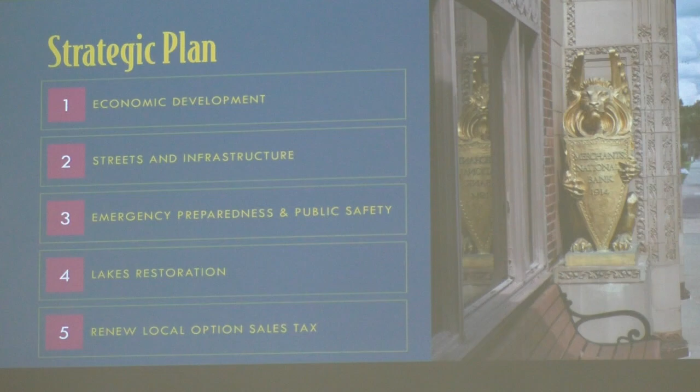The last time I was here, we had just launched the city's strategic plan, which is a 5-year all-encompassing plan that talks about what the city's initiatives are going to be, all-encompassing citywide. We had broken it down into 5 main points that we wanted to focus on for the next 5 years.

And the thing about the strategic plan is, in my time with the city, I have worked on a lot of plans. I've been here for a year and a half, and I have had to review 2 housing assessments, a downtown assessment, a comprehensive plan, a land use plan, a master parks plan, a capital improvement plan, and a pavement and streets quality plan.

It seems like before I started, it felt like the city was always putting out all of these plans, and what were they doing about them. So the strategic plan is when the city council and the mayor get together along with city staff, and they really take a look at those plans and break them down into tangible things that need to be done, and then create this all-encompassing plan that goes over top of it and says, these are what we're going to focus on, and these are what we're going to work on for the next 5 years.

This is how we're going to spend our money, whether that be money from property taxes or from local option sales tax or from grants or from federal funding, any of that stuff. This is how we're going to spend the money, and this is how we're going to make this community better for the people who work and live here.

So like I said, we had 5 major pillars in our strategic plan. I'm going to go a little bit out of order on updating you guys on these because one of them is already done. At the election last month, we successfully passed our renewal of the local option sales tax.

Local option sales tax, because I don't want people to forget how important this is to our community, it generates about $1.6 million per year for the city. And that all gets reinvested locally. It goes toward your streets, it goes toward your library, it goes toward your parks, and makes those spaces better. It's a really dependable source of revenue, and it's one that isn't entirely contingent on the people who live here.

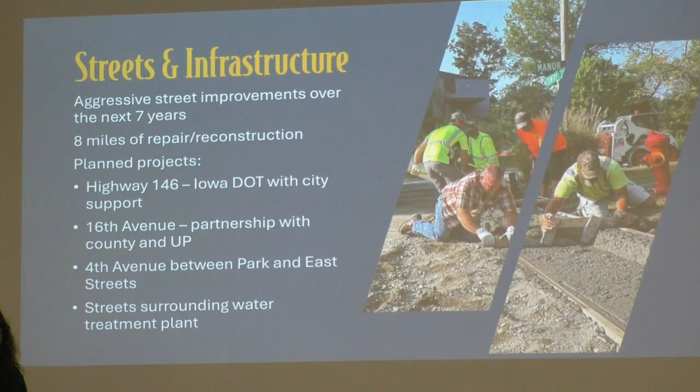Our next pillar is streets and infrastructure. I'm not going to talk about water infrastructure because it's a huge topic and Keagan has like 40 slides on it. But we are working on water infrastructure improvements, and it's going to be amazing — he'll tell you all about that. I will talk about streets, because there's a lot coming.

We are aggressively improving our streets over the next 7 years. We have a whole plan listed out. If you want to know which streets are going to be repaired and in what year, I can find that in the plan and tell you — please reach out to me. I'm not going to publish that one online because it's a huge document.

In the next couple of years, the Iowa DOT already started patching on Highway 146 — you've probably seen it if you've gone out to Walmart. I'm really sorry, that one's not us. Then they're going to do an asphalt overlay and a 4-to-3 lane conversion on that highway in the summertime. It's also going to be paired with a lot of underground work, whether that's water or sewer. We're also expanding the sidewalks, the bike trail, and some of the lighting out there. So there's some city involvement in that project to make the highway more user-friendly for pedestrians and bikers, and to make sure it's well lit and easily usable. But the DOT is doing the road work because it's their road.

And then on 16th Avenue, we're partnering with the county and the railroad to expand that, put in curbs and gutters, and expand it so it's a little bit easier to walk on, and you don't hit skateboarders, bikers, and walkers along that road. I think there will also be some lighting upgrades along there too.

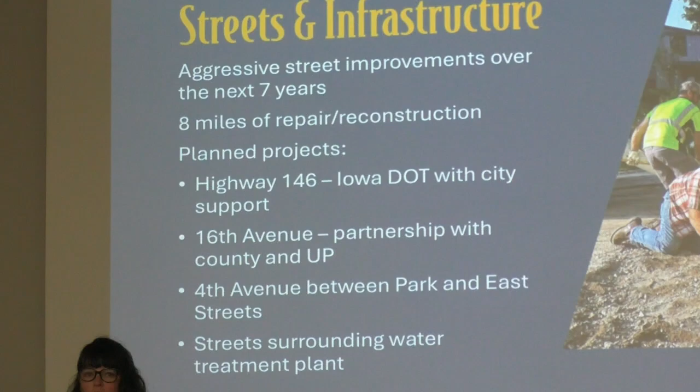And then the streets surrounding the water plant, once we're done with all of that construction, those are going to be a priority to get fixed around the water plant and Mayflower, so that they're not all gritty and gross and beat up from all of the construction work that's been happening over the last few years.

Emergency preparedness and public safety was our other focus for the strategic plan. We have had some interesting things happening already, and we will be doing some more things moving forward.

The police department just announced today that they got their accreditation for the CALEA law enforcement accreditation, which is a really big deal. They went through all of their policies and procedures and also their building, basically word by word, to make sure that they met national standards and refined and updated them. There are only 13 communities in Iowa who have this accreditation, so it's kind of a big deal. It's to make sure that our police department is up to standard and is following regulations and procedures that are nationally recognized across the board.

Our fire department and EMS team have also expanded. We're now up to 8 full-time and 1 part-time certified paramedic, which is amazing, because once they get to certified paramedic level, they can provide advanced life support instead of basic life support. So as opposed to just doing CPR, they can do IVs, administer drugs, and do things they wouldn't be able to do as basic EMS staff.

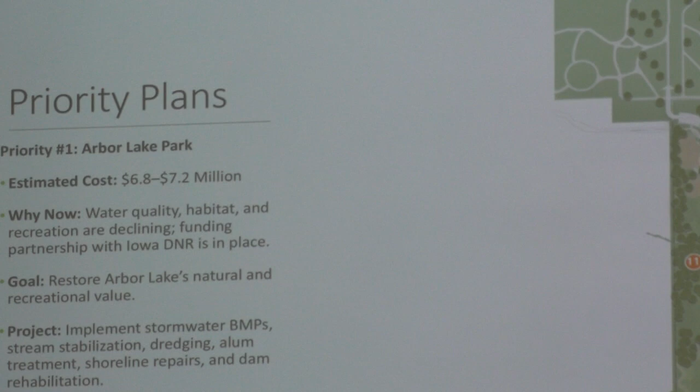So this is the fun part of it, the priority plan. Priority number 1 in the plan is Arbor Lake.

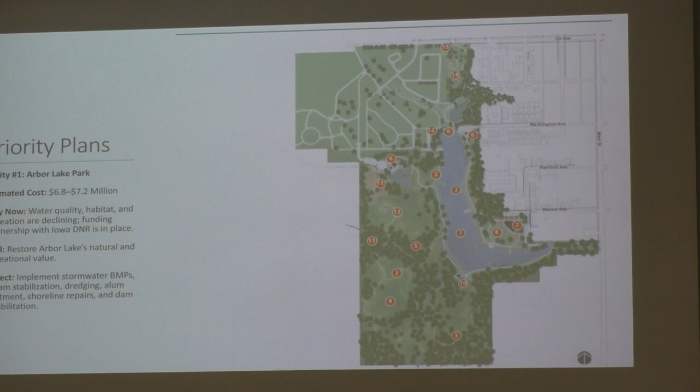And the cool thing is that we're already in the process. We've hired an engineering firm, Houston Engineering, Inc., for restoration on this body of water in partnership with the Iowa DNR. So we're in process with that now. They'll be engineering this project. So when I say project, it would just be the lake and the watershed stuff.

And then the park amenities would come in a little bit later. Over the next 12 months, there'll be engineering. We'll have some open houses on some design and stuff like that.

But basically, we need to dredge that body of water. There's 50,000 cubic yards of sediment in there, and it hasn't been dredged since the mid-'70s.

And a lake generally in Iowa goes about 50 years before you need to dredge it again. So we're at that point, and we want to make sure that it is a viable recreational space for the community for many, many years to come.

And so there'll be key features that we put in there. So an idea would be to pave the trail all the way around the lake, have ADA access to all the fishing jetties, and then kind of the hub of the park right here would be...

What is called in the plan the Commons, which has a day lodge and play spaces and natural play for the kids.

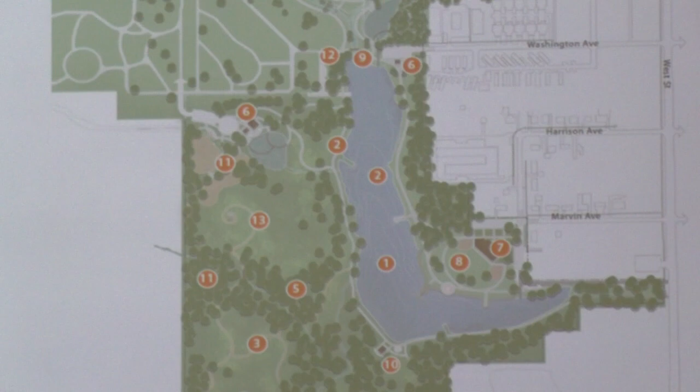You'll see the estimated cost is around 6.8 to 7.2 million. About 6 of it's going to come from the lake restoration part of it.

So that would be priority 1, which also leads into priority number 2, which would be Lake Nyanza at Miller Park. Lake Nyanza is actually within the watershed of Arbor Lake.

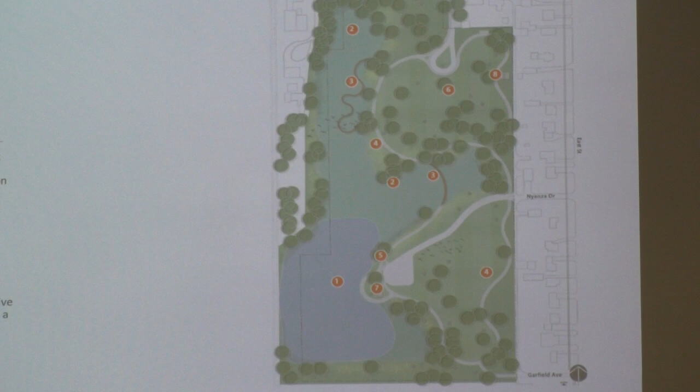So to do the project at Arbor Lake, we have to include Nyanza as well. So the current engineering that we're doing on Arbor Lake also includes Lake Nyanza at Miller Park.

Right now, what is suggested is to turn that body of water into possibly a natural wetland, depending on what the U.S. Army Corps of Engineers lets us do with this.

But this body of water was originally just to fill the steam engines on the railroad, so it was never really meant to be a recreational body of water. It has a mean average depth of about 2.5 feet, and there is 50,000 cubic yards of sediment in that one as well.

And if everyone knows, Miller Park is a little bit landlocked, which causes a little bit of issues if you wanted to do a mechanical dredging.

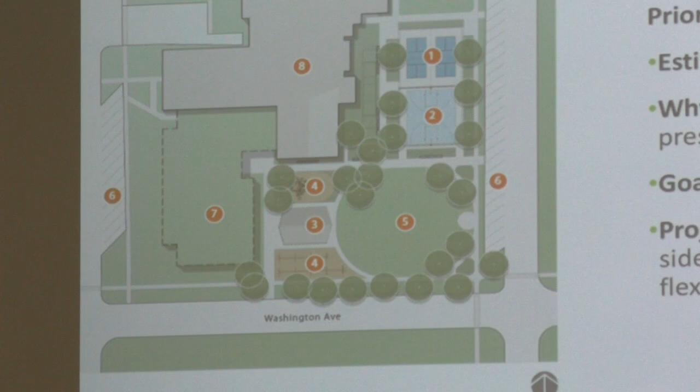But we're in the process of those 2 projects. And then priority number 3 is actually Davis Park, which is the land at Davis School.

We are actually under contract with design right now with the firm that did the master parks plan. And over the next few months, we will probably be publicizing what an actual design of this space looks like.

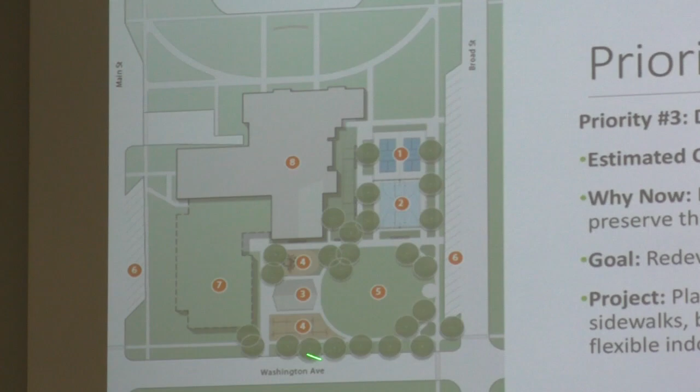And the hope is, if everything goes as planned, we could be making significant construction on that next year, at the end of next year. But we will cross our fingers.

Priority 4, which is going on right now at Central Park, is the Veterans Memorial Monument. Adrienne touched base on that a little. That'll be coming up next summer, and it's in process right now.

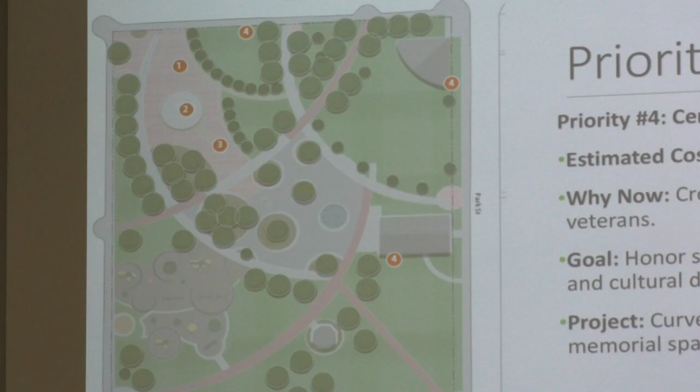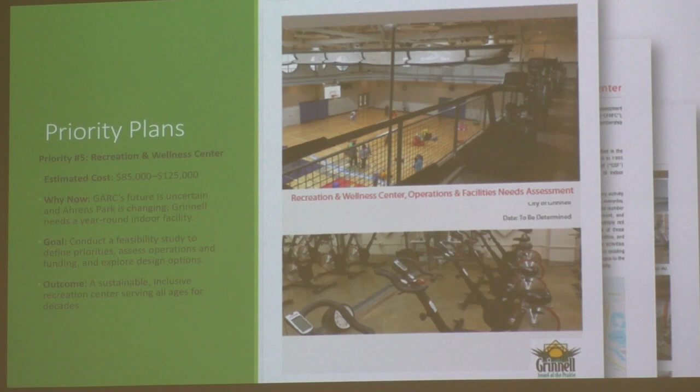Number 5 is a feasibility study on a new recreation and wellness center. As I mentioned, people want a one-stop shop for recreational needs heading into the winter. The first step would be doing a feasibility study to figure out how we'd fund it, operate it, and where it could even go. We would contract a firm to do this study, and piggybacking off that would be a soccer complex feasibility study as well.

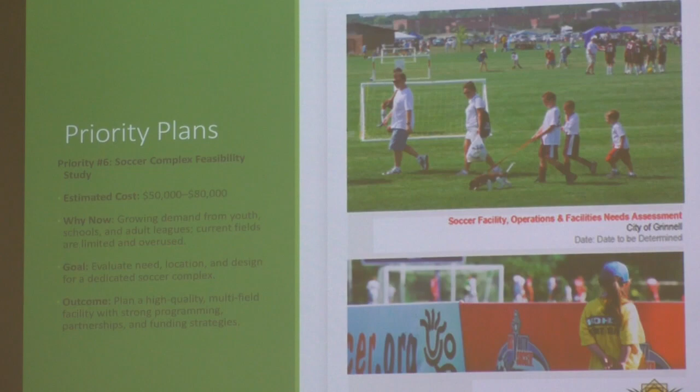Soccer continues to be a very popular sport nationally and is growing in Grinnell. We have roughly over 300 kids who play youth soccer here. With the space impact from the new elementary school, we hope to find a new space to keep growing this sport in the future.

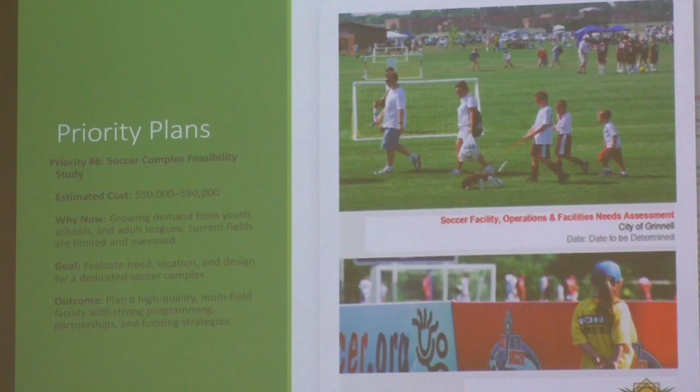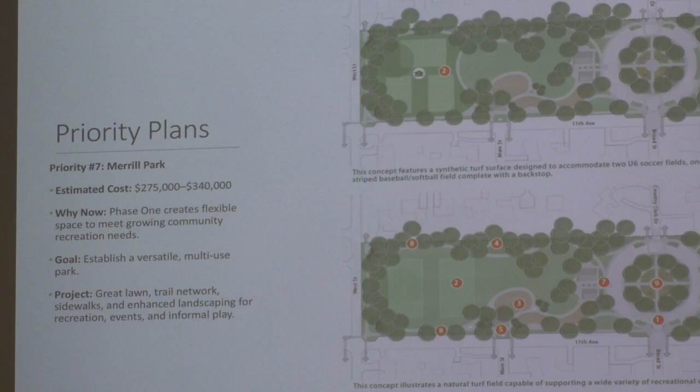Merrill Park is number 7. The estimated cost shown here is for this end of the park, the west side. The idea would be to remove the ball field and create a multi-use green space that could serve a variety of activities, while keeping the infield layout with the backstop so people could still use it as a practice space if they want. We'd also consolidate the playground on the western side so it's not split anymore, and add natural art in the center circle with a natural landscape on the eastern side of the park.

Priority 8 would be Summer Street Park. The priority there is to update and expand the existing playground, and then clean up the creek, making a creek walk and creek restoration project down there in the future.

Expansion of the skate park is another priority. It's been open since 2019 and is used almost every single day, with tons of kids there during the summertime. It's probably one of the most popular park amenities we have.

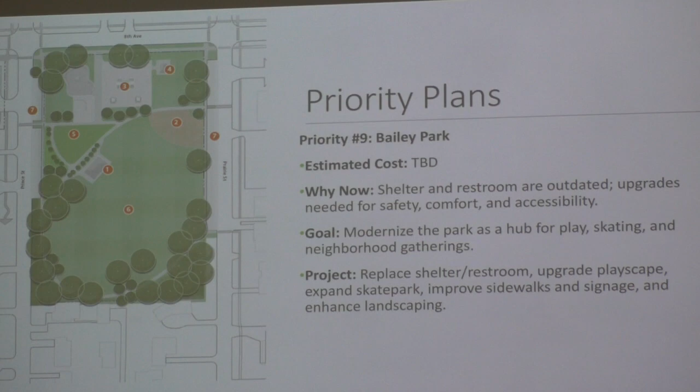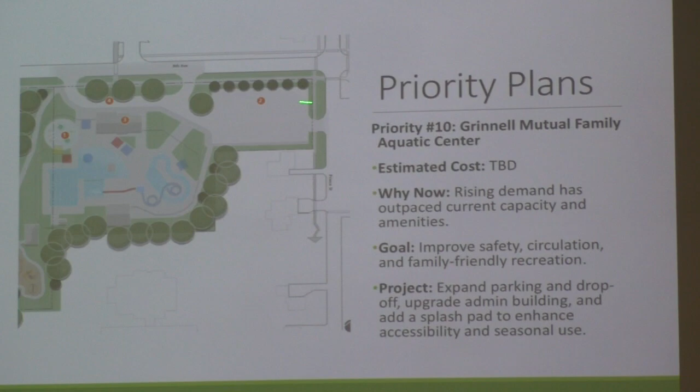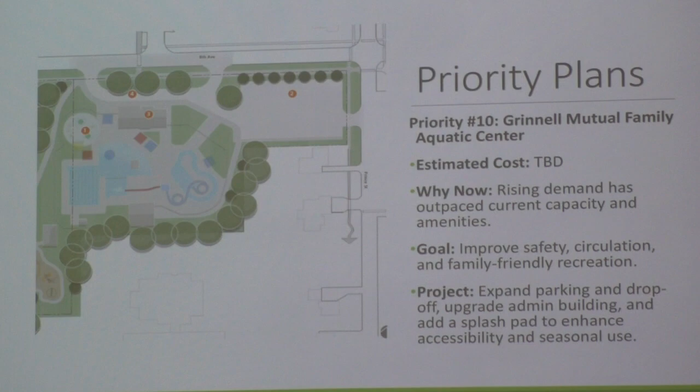The aquatic center is priority number 10, with priorities mainly being expanding the parking and creating a drop-off zone, expanding the bathhouse for staffing considerations, and possibly implementing a splash pad as a new amenity—though I can't guarantee that will happen anytime in the future. The final priority would be updating our signage and wayfinding master plan.

When implementing these park projects, signage is key to making sure people know where they're going. We have a brand, so developing a master plan for what that brand could look like will set us up for the future as we work park by park and update signage so it's consistent throughout our parks and recreation system.

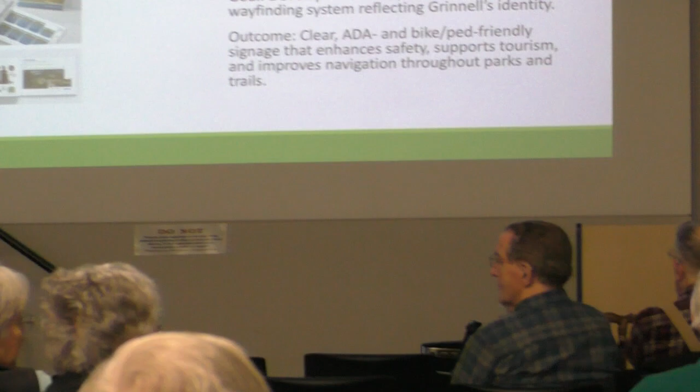Question: What is the timetable as you move down these 11 priorities? Do you finish number one before moving on to anything else? Answer: Priorities 1 through 4 are actually all in motion. I'll say 1 and 2 will probably take up a lot of our time over the next 5 years—projects restoring bodies of water take on average about 3 years from the start of construction, and we're still in the planning phase. So that'll eat up a lot of our time. We could probably sprinkle in some of the smaller ones, like the feasibility studies, since those are more plans and studies and don't take much manpower. But after that, the rest are out into the future—probably 7, 8, 10, 15 years for some of those, for sure.

Question: How did you define cultural diversity as it pertains to Grinnell—is that done by percentages of different ethnic groups? Answer: When they did their demographic research and talked with focus groups in the community, the trends of our community and parks and recreation, that's how they determined it.

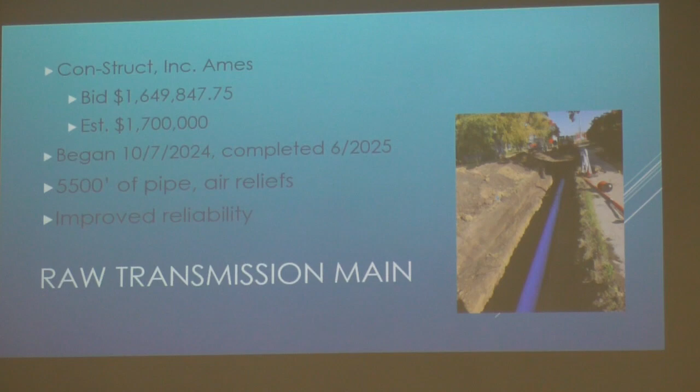First project I wanted to mention is, for all intents and purposes, complete: the raw transmission main project. This was the piping that carries water from our wells to our treatment plant. Some of it was in bad condition, some was fine, but we wanted to make sure it was replaced in preparation for the new water treatment plant. We wanted to increase resiliency and make sure everything was super reliable. Con-Struct out of Ames and Marshalltown did this project for us.

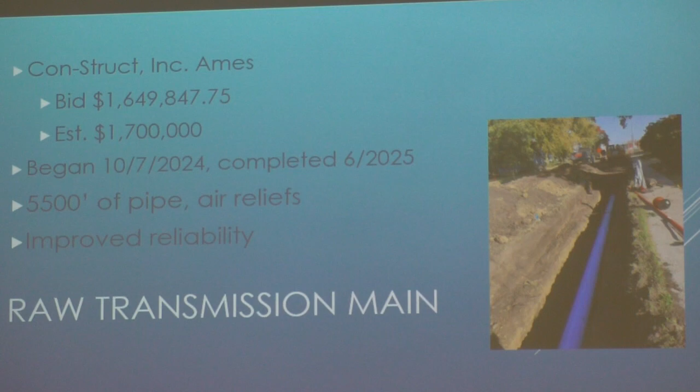They did a really great job, great crew to work with. I think there was about 5,500 feet of pipe put in - raw and treated water main east of East Street along First Avenue. That was kind of a problem area, and since we were going to be there anyway, we went ahead and took care of it.

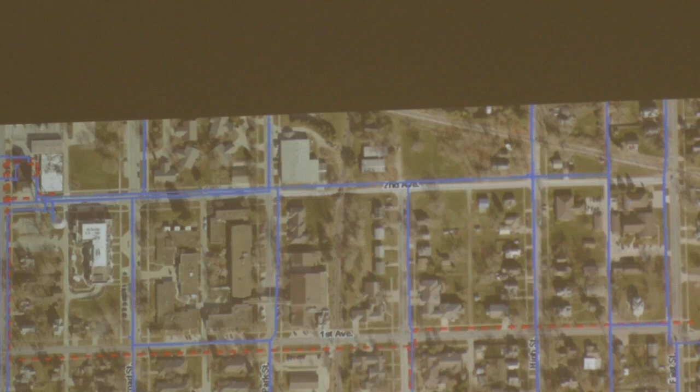This is a blown-up photo of the route. Here at the upper left we have the water treatment plant. We followed Main Street down, then went down First Avenue to Well 8, which is clear over here. I don't know which button it is - it does have a laser.

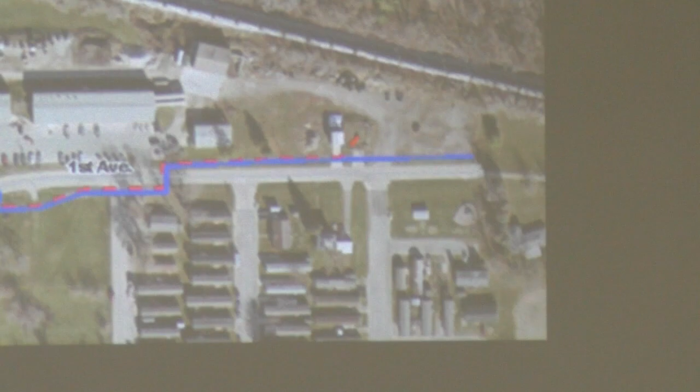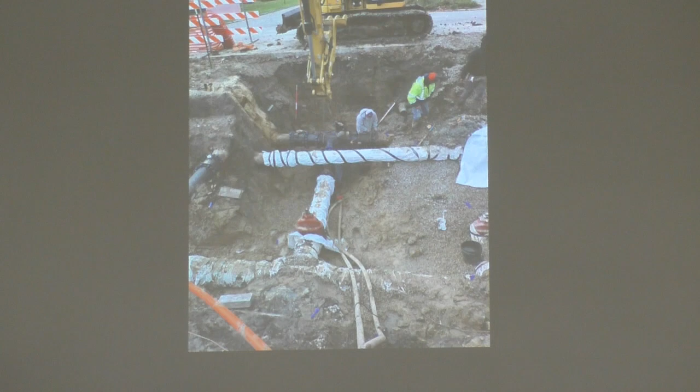This photo illustrates the process of laying that water main. Dig a big trench, get it down to the right elevation, install the pipe, wrap the metal parts with plastic to keep the soil from contact. That helps inhibit corrosion.

This orange tube is going to be a duct for our fiber communication lines that we're going to use to communicate with our wells and our new water tower. Our control wiring currently is based on telephone lines, which are generally reliable, but if we have a derecho or an ice storm, it can really mess things up. So we're not getting signals from our wells or water tower, and we have to do things manually, which isn't ideal during a disaster. So this will be underground and super reliable.

Like I was saying before, we lay that pipe down, bed it in rock, and then they backfilled it as we went. This is ideal when installing water mains because it impacts people's driveways less and creates fewer safety concerns if you're filling up as you go. Sometimes that doesn't happen on projects, but these guys did a really great job of it.

You can see here we have a gas service and a water service. We encountered plenty of that along the way.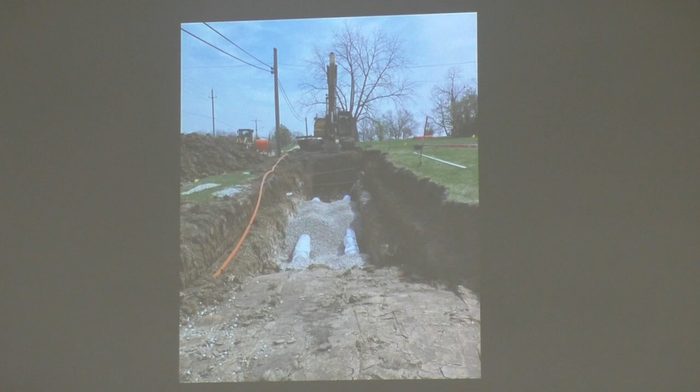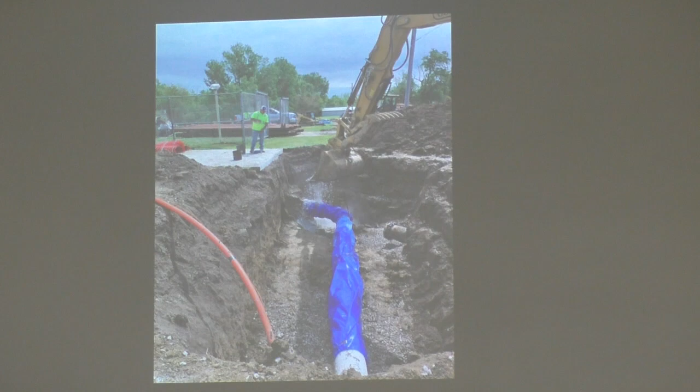This is the end of the raw water main project at well 8, which is inside this fenced area here. We tied on to the existing piping. There will be some more work done with this along with the water treatment plant project too, so some of this will be dug up again within the next year.

Next project is well number 10. Before we move on, can I ask you a question real quick? Yes. So that's a lot of digging you've done and an incredible amount of work. How long would ideally all that last? I know you just talked about redigging some of it in about a year, but all that piping and the fiber you laid as well, how many years do you think that will go, or should?

The industry says that plastic pipe should last about 100 years. We have cast iron pipes that were put in at the turn of the last century that are still serving the community, so plastic's supposed to last longer than that. Should be good for a long time.

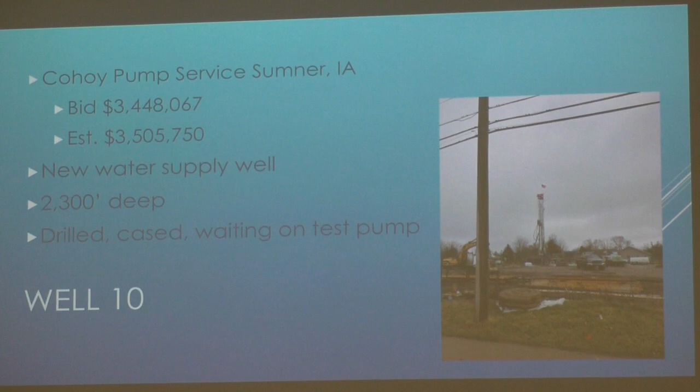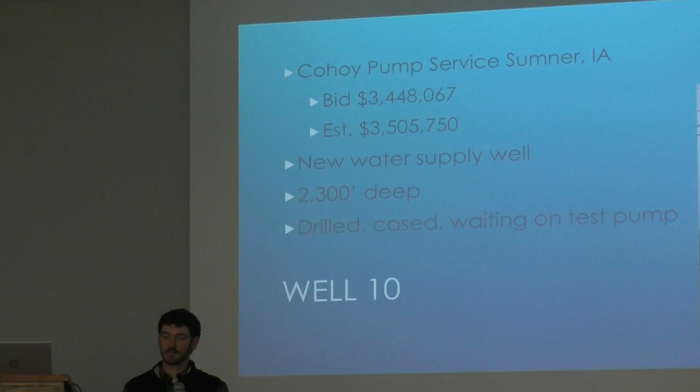So well 10 should be complete within the next month. This hasn't gone exactly according to plan. The timeline has been extended a few different times as we've run into issues. The hole is drilled, the well is cased, everything is in there as it's supposed to be. It's just taking a lot longer.

They should be test pumping this well tomorrow evening or Friday, and that's the final piece of this phase of the puzzle. It's about 2,300 feet deep. Our pump will be sitting at about 640 feet. It's supposed to produce 1,200 gallons per minute, and during the last testing we were able to do, it was producing 1,480 gallons per minute, so we're good there.

This picture is kind of small, but you can see the well drilling rig that they set up initially on site. This was before really any major water treatment plant work started.

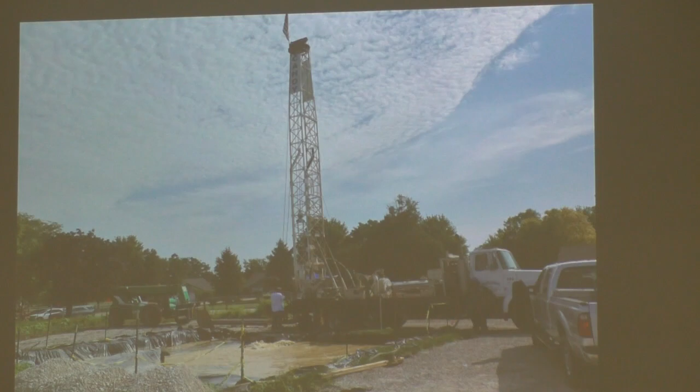Here's a closer view when they started drilling the well. This is called a slurry pit. The well drilling process actually uses air and water to lift the cuttings from the bottom of the hole rather than physically removing it. There's a drill bit that rotates and crushes whatever substrate they're going through, generally rock, into little pieces. The center of the bit and the piping going all the way up to the drill rig is hollow, so they force air and water down to the bottom, and the air carries everything up to the top into that slurry pit for removal later. Kind of an interesting process. The well drillers use all sorts of agents to make the water a certain density to lift out different types of rock. It's all much more complicated than what I understand, but I have a surface-level understanding of it. Pretty interesting process.

Well 10 is at Broad Street and 2nd Avenue, right in front of the new treatment plant.

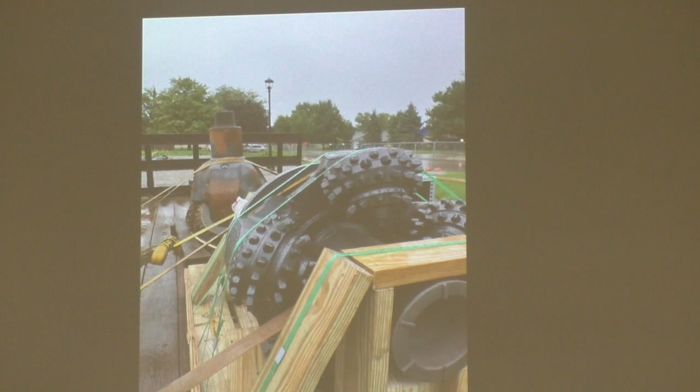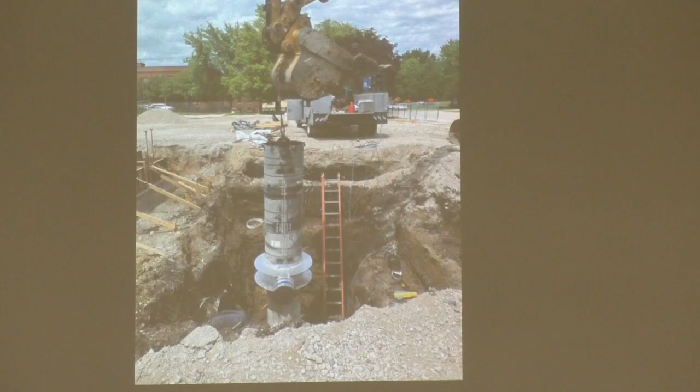Next is the water tower. We've probably all seen the pedestal out on East Street, south of Ogan Avenue. This one's going really well. The concrete pouring process was really neat, and I've got some good pictures of that. The pedestal was done in September, and they're starting to weld on the tank portion now. They're hoping to lift up the tank in February, but I'm not sure they're familiar with February weather. Caldwell's from Kentucky, they build tanks everywhere, so I think they'll be pushing it to get that done before spring, but we will see. This is supposed to be online in August of next year.

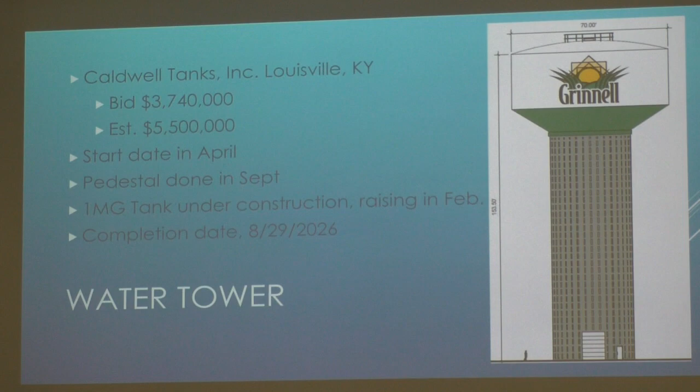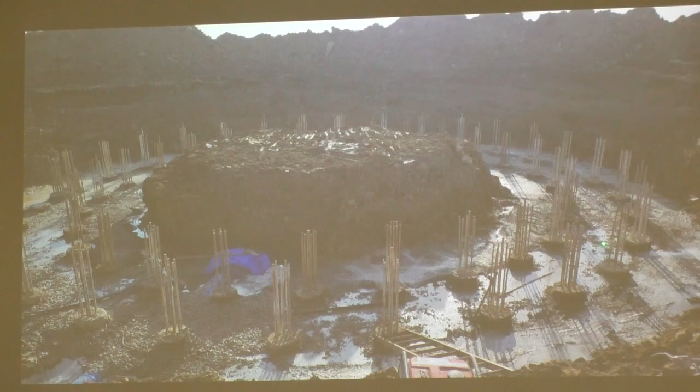Initially, they cleared a little bit of land. They brought in a crane with a huge auger and drilled piers 75 feet deep, filled them with grout and rebar to create the deep foundations for the water tower. You can see the rebar sticking out here. There's around 52 of these piers that were drilled in, and it only took about 20 minutes to do each one. It was a pretty interesting process.

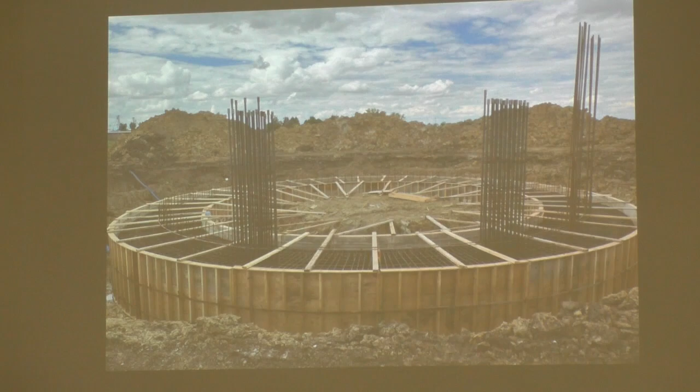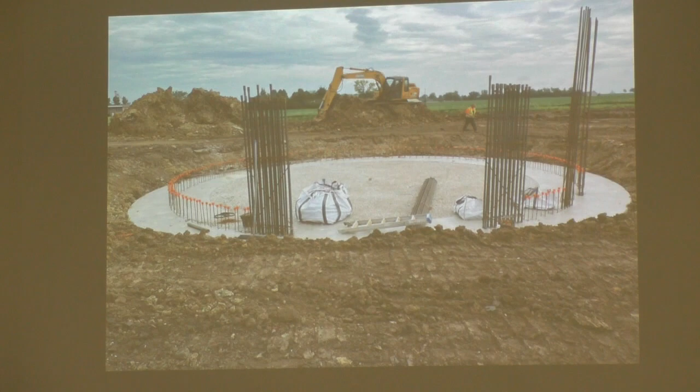These piers go all the way around the circumference of this hole. Then the next step, they formed up a big concrete donut around the top of those. I want to say this was about 75 yards of concrete, but it could be more than that, I can't remember off the top of my head. These rebars here are reinforcement for around the garage door and also the walk door that will be installed in the pedestal later. So there's that footing completed.

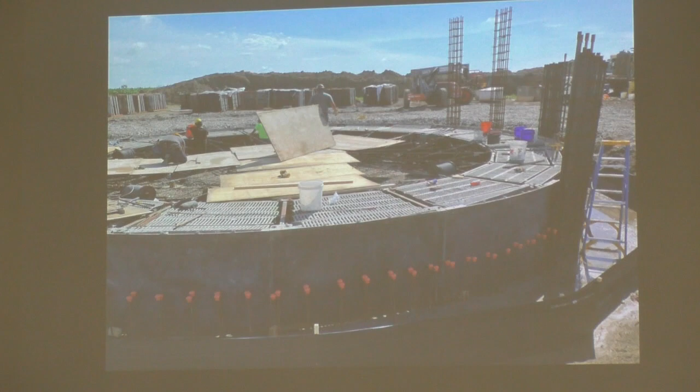Here's the beginning of forming for those rings that built up the pedestal. Pretty cool process - in the center they have what they call their platform. It's actually supported by the interior forms while they're going up, so this platform travels with them as they're working. This is the inside of the form, and then the outside will go around. They go up 3 or 4 courses, pour a few, then leapfrog the forms, and that platform climbs with them. Pretty interesting.

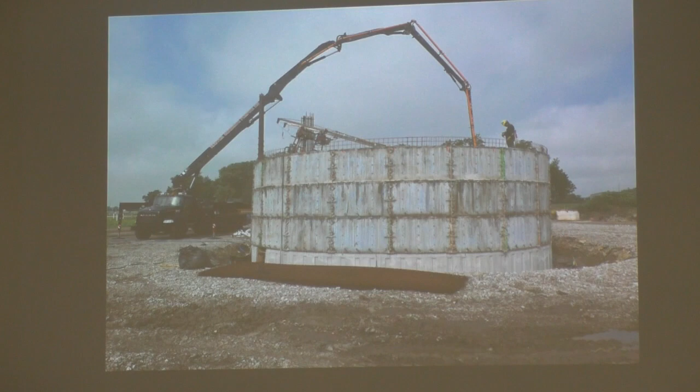So here they are pouring. Every bit of that concrete was pumped through a truck like this. This is the reinforcing steel that they use. They have little cranes that rotate around so they can lift materials up to the top.

Here we see the pedestals getting close to being completed, and they've moved in forms for pouring the dome at the top of the pedestal. That actually forms the bottom of the tank. There's no water inside of this structure - aside from a few pipes, it will be open all the way to the top. We'll use this for maybe a little bit of storage, and we'll have some controls inside of here, and that'll be about it.

This is a picture of the final pour of the pedestal, and over here they've started moving in steel. This was just a couple of weeks ago. They've progressed a little further now, but I haven't had a chance to take a recent picture.

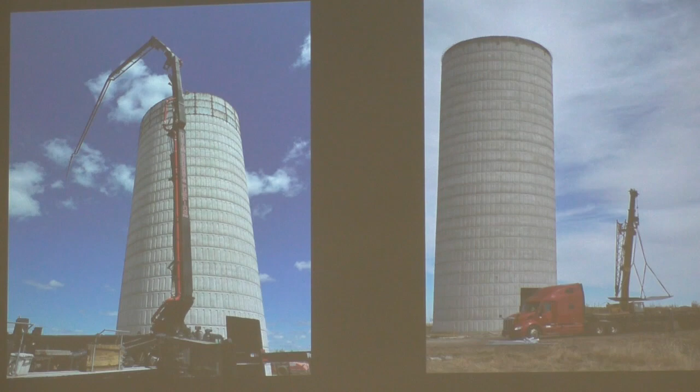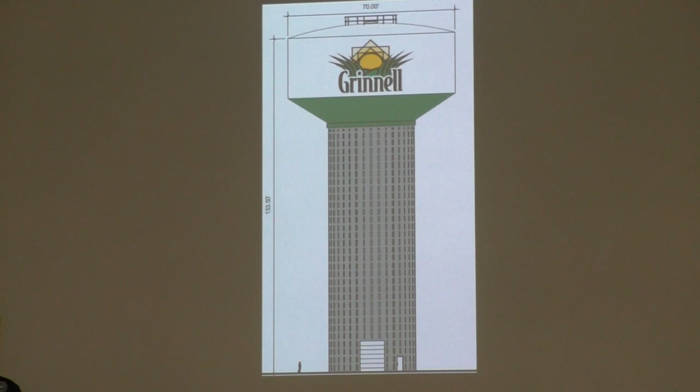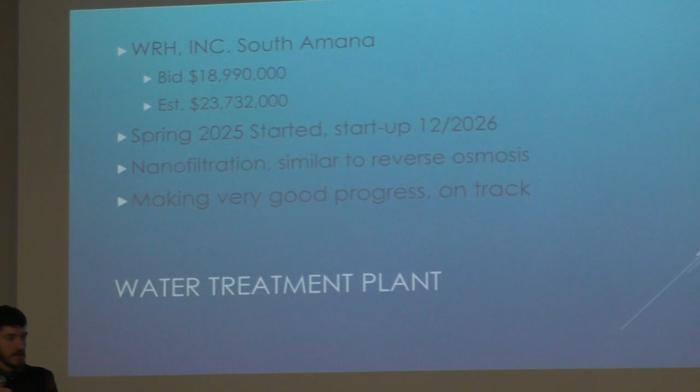The water treatment plant is well underway. We should be able to start using water from the treatment plant next December - pretty exciting, I'm ready for that, and I'm sure you all are too. We're going to be using a nanofiltration treatment process, which is very similar to reverse osmosis - basically high pressure water forced through a filter to remove anything other than water.

Everything is going basically according to plan, but we're on track. We've had a couple of hiccups, but you'll have that on a big job like that.

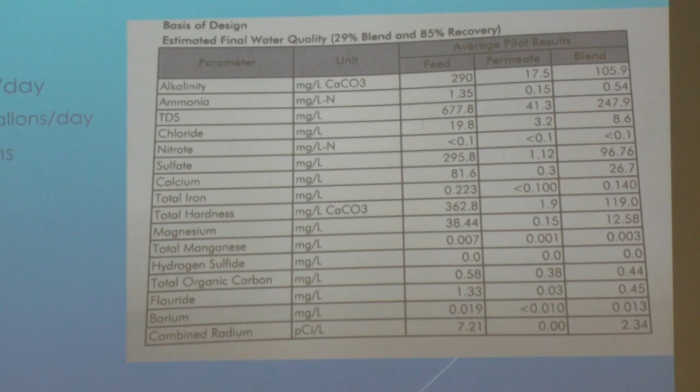Day one, we'll be able to produce 2.1 million gallons of treated water a day. Currently, we only go through about 1 million, so we have plenty of excess capacity if industry were to come to town and the population were to grow. But the treatment units installed day one will be able to be expanded to about 2.6 million gallons a day by just adding a few more pressure vessels. So we have plenty of flexibility there.

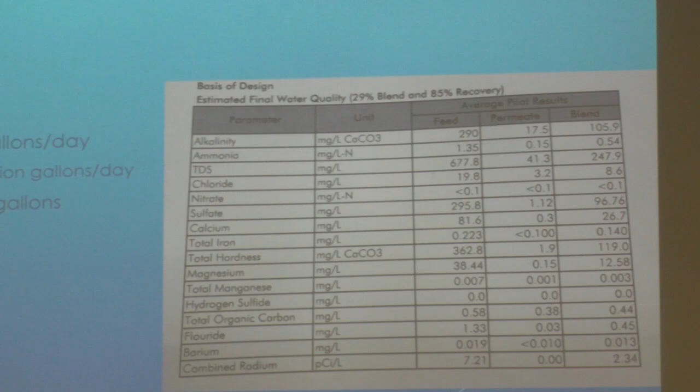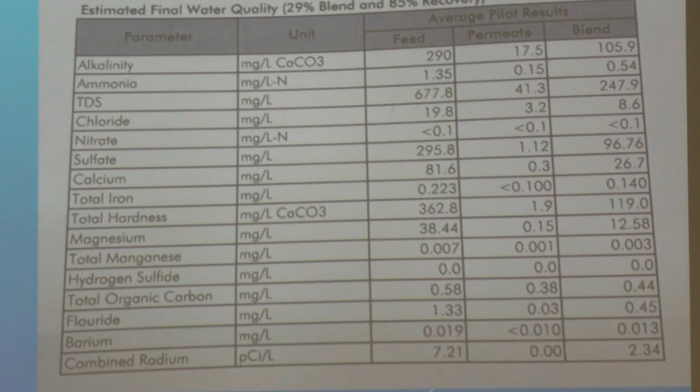On the right here is the water quality factors that we used in designing the treatment plant. We got a lot of these numbers from a pilot study, where we took a miniature treatment plant, set it up beside the existing one, and ran water through it to see what would happen. This column is the water we were feeding to the pilot unit, and this is what we got out at the end.

Some of these parameters are kind of targets. Let me see what I'm looking at here - 119, that's 119 milligrams per liter of hardness. Currently we're putting out about 340, which I'm sure you've noticed. This equates to about 7 grains per gallon. So our goal is reducing hardness, reducing iron, reducing manganese, to produce better quality water. We proved that the treatment system we selected works very well at doing that.

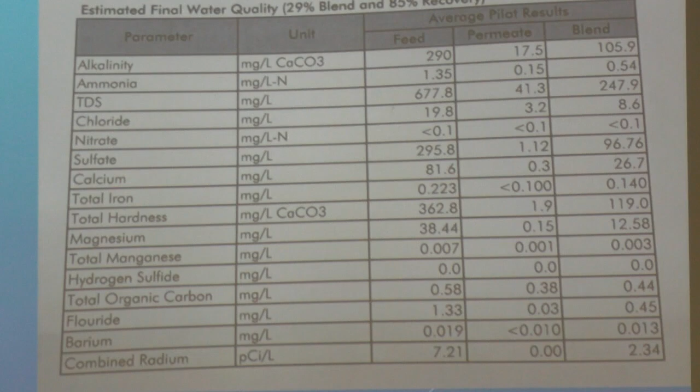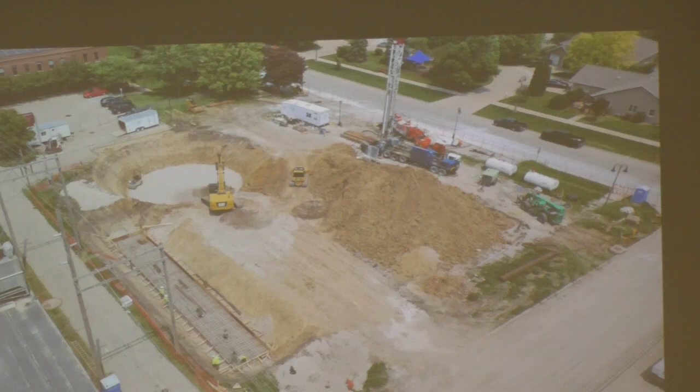This first picture is taken from the existing water tower after a decent amount of dirt work had been done, and the well is well underway there. This is the foundation work for our clear well, our finished water clear well, forming up for the pipe trench where most of our plumbing will come in to our treatment units in the plant.

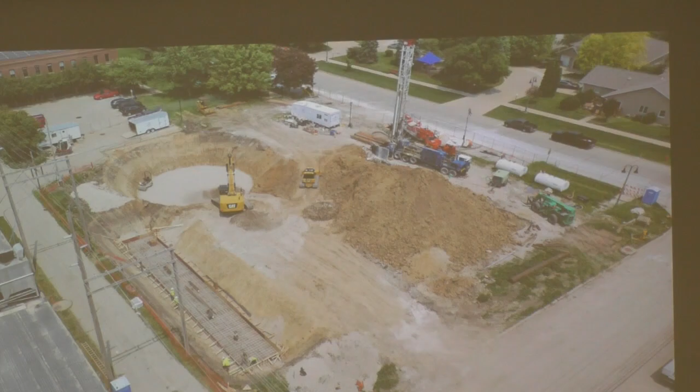Here we've got some building footings, pipe trench, getting ready for concrete. There's the pipe trench a little bit more built.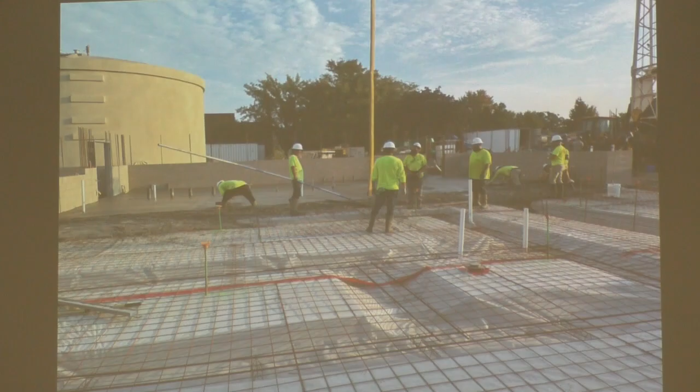This is some piping that goes in between the treatment plant and our clear well. These are where our high service pumps will live. We'll use a vertical pump that sits inside of the steel casing. The motor will be up here. It'll pull water in from the clear well and push it out into the distribution system and to the tower.

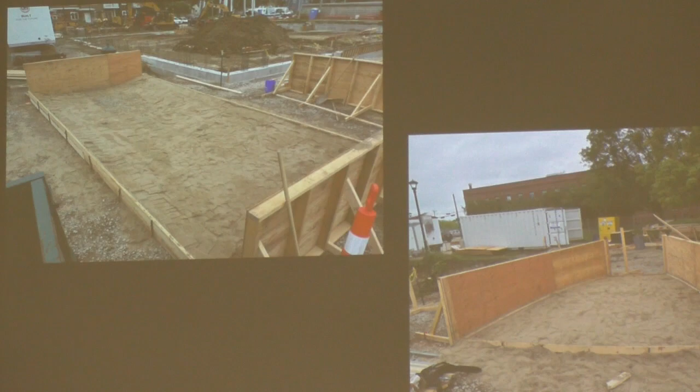This next part is pretty exciting for me. This is one of the coolest construction procedures I've ever seen. And maybe I'm weird, but I think it's pretty cool. This is part of building our clear well tank. It's a 300,000 gallon, actually 328,000 gallon precast concrete tank. What I took that to mean was that they were going to ship in big concrete panels and set them up. What they do here is actually form and pour them on site. It's super efficient, and there's no wasted effort.

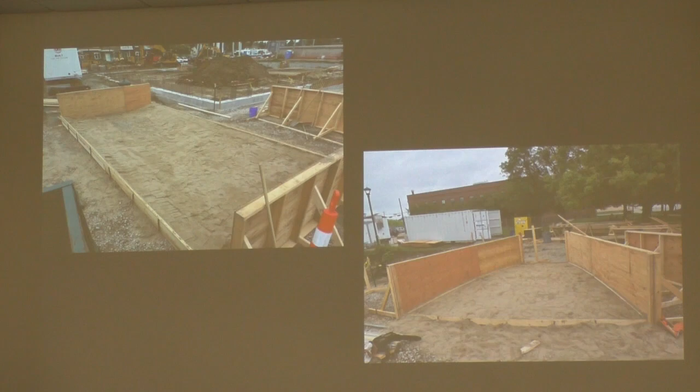It was really neat. Each of these is a form - these are for a wall panel, this is for a roof panel. They had two of each type of form there, right on site. They would pour a layer, put a piece of plastic over it, and move the form up and pour another layer. They poured every piece into those four forms, and then they picked it with the crane and set them all up in one day.

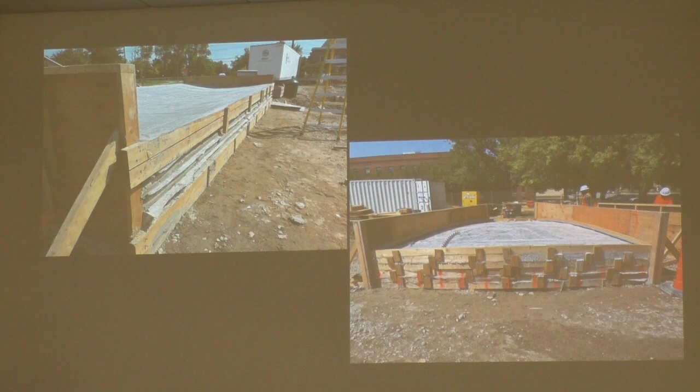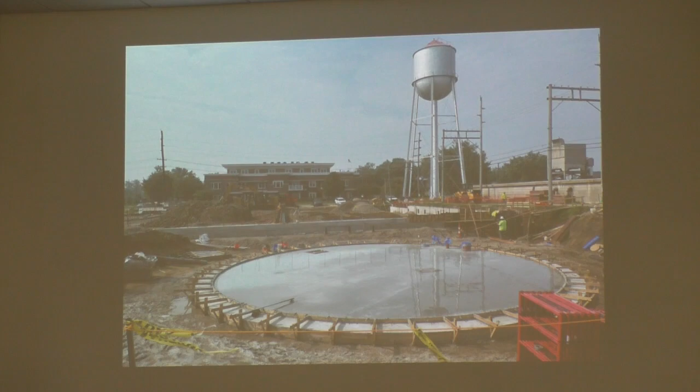This is the foundation that we saw from the tower earlier. That big hole now has a foundation. And then, I think it was on a Friday, they began setting up the panels. This center part supports the roof until they get everything secured together.

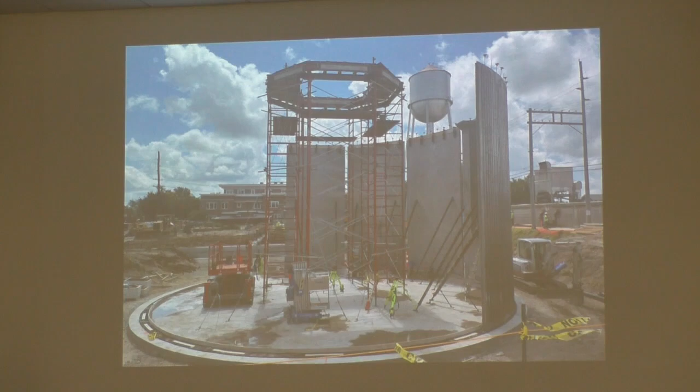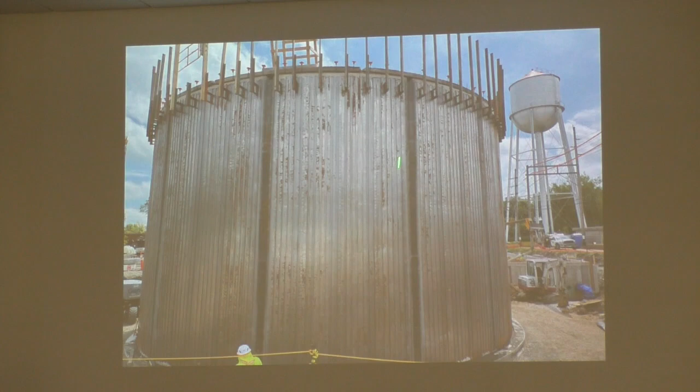Relatively thin concrete with a steel skin on the outside. They have sort of a junction that they put in between the panels, and they grout between it. Then they laid the roof panels on.

One thing I don't have a picture of is that what gives this tank strength is a high tensile wire wrap around it - there's three layers of high tensile wire around that thing. Then concrete is sprayed on the outside of it to hold it all together, and it's painted. This is the interior inspection we were doing to make sure everything was up to snuff. It really echoes in there.

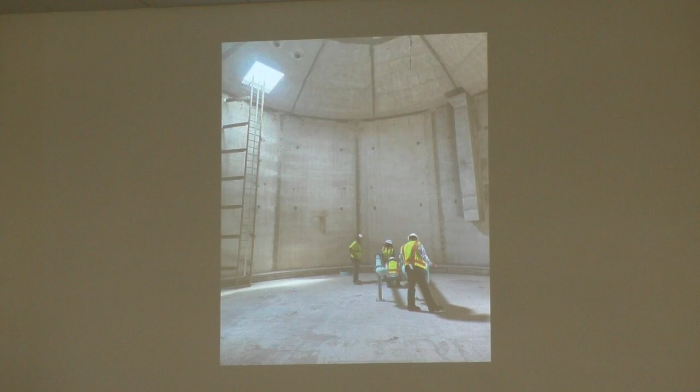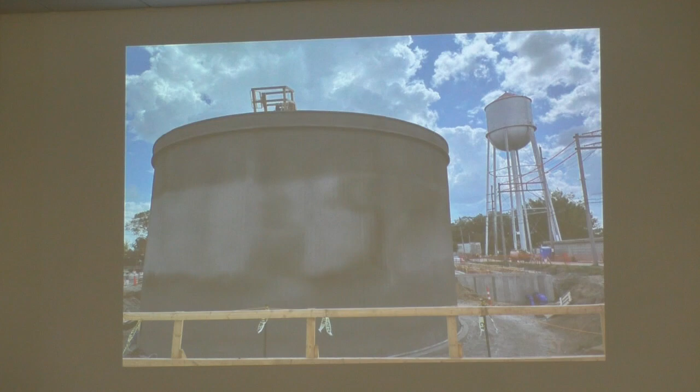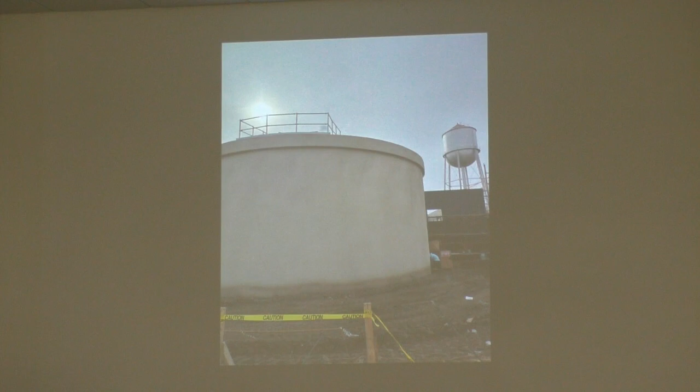So here it is - after, I don't think this is final concrete spraying. We can kind of see a little bit of the wire through here. And then it's been coated, and it rained on the mud, so it made it look nasty on the side, but we'll have that cleaned up when she's finished. This is what the building currently looks like from the southeast corner.

So obviously this brick is done here. They've actually completed the brick on the north side. They're working on the west side. I would expect them to be done with this brick, all its exterior brick, within the next 3 weeks.

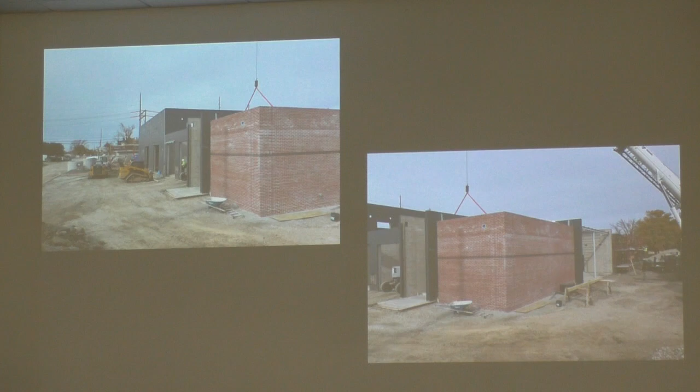A lot of the interior block walls are completed. The floors are poured. They're putting in ceiling girders so that they can get the roof on and get that closed up.

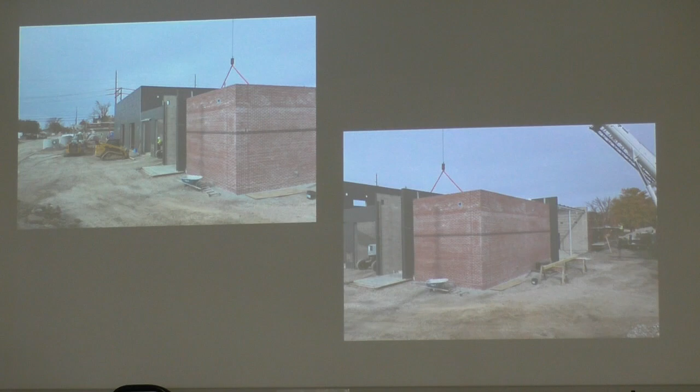The black here, the red and the black and the green. So the brick is going to be installed over that black as well. This black is just an air and vapor membrane that's painted onto the concrete blocks, so they put the bricks on the outside of that. The brick will be all the way around.

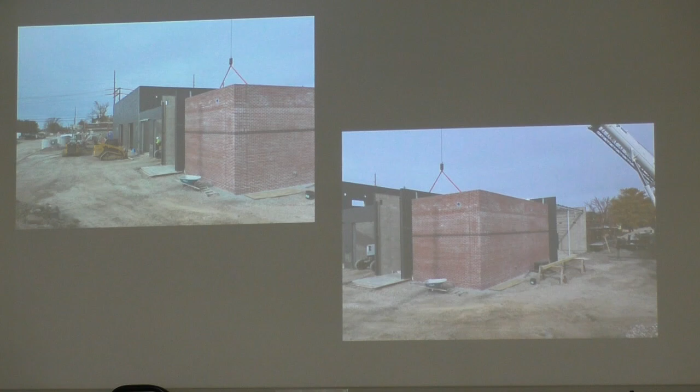So they're hoping to get the roof on so they can get it closed up and do interior work during the wintertime. They're working feverishly to get that done, and I don't blame them.

I think that's the end of my pictures on the water plant. Anybody have anything on the water plant? I have a few more slides on another project, but yes.

No, everything will be inside. There's small pumps on the treatment units, and then we'll have 3 high service pumps. So the noise that you can hear standing outside of the current treatment plant will probably be all that there is.

And when they don't get the mic, would you repeat the question? Otherwise it won't get recorded. I sure can. He asked about how much noise there would be associated with the new treatment plant, and I said it would probably be similar to the current one, which is not a whole lot on the outside.

Can you tell us what day one will look like for us on the user end? Will there be a time, like how do you shift from what we're doing to the new? What does that look like for us?

We'll probably be doing some hydrant flushing during that time. We're going to come online after our usual hydrant flushing time, but I think that when we start putting that new water into the system, we'll go out to far-reaching areas and flush to try and change over the water, so to speak.